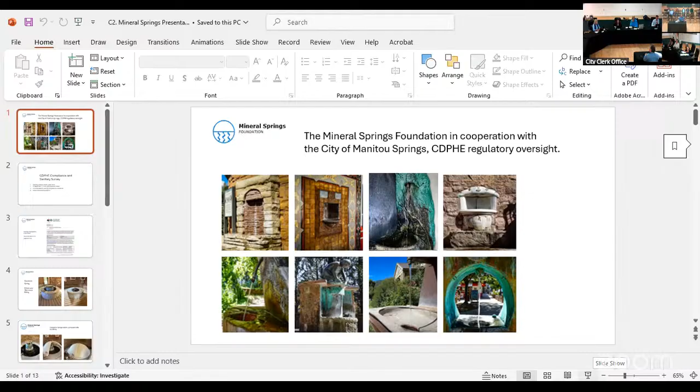Good evening, counselors, ladies and gentlemen of the audience, Mayor Graham, Mayor Pro Tem. My name is Douglas Keithley Edmondson. I am currently chair president of the Mineral Springs Foundation, and I'm here this evening to share some perspective on the current situation of the Colorado Department of Public Health and Environment's regulatory oversight that has taken place in the last 3 to 4 years with the Mineral Springs Foundation.

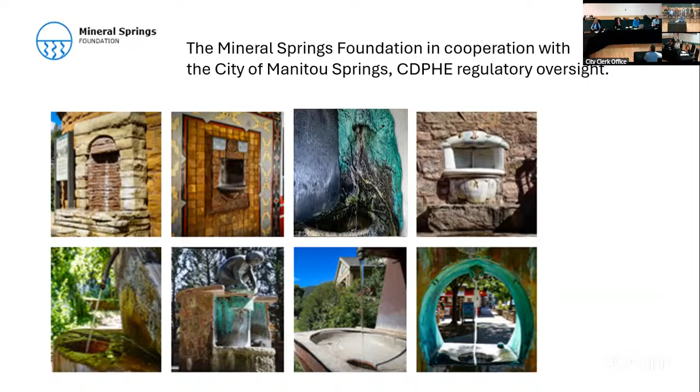Then in June of 2023, we had a sanitary survey conducted of all 8 springs, which are under the umbrella in cooperation, in concert with the Mineral Springs Foundation and the City of Manitou Springs. 8 major deficiencies were found and 11 minor ones.

These things basically started with screening on certain openings, what are called duckbills or tideflex exclusions for drains, up to major deficiencies such as Navajo Spring and Cheyenne Spring, that were open cisterns requiring engineering to be sealed. Also, one of the things we did not have was a monitoring and maintenance schedule acceptable for CDPHE's requirements for a municipal water system.

I'll start off with one of the major deficiencies. Shoshone Spring, as you know, was an open cistern. This is a before and after picture of it. Some of you remember the gas bell that was there that was removed. It was conserved and is on display inside of the rotunda.

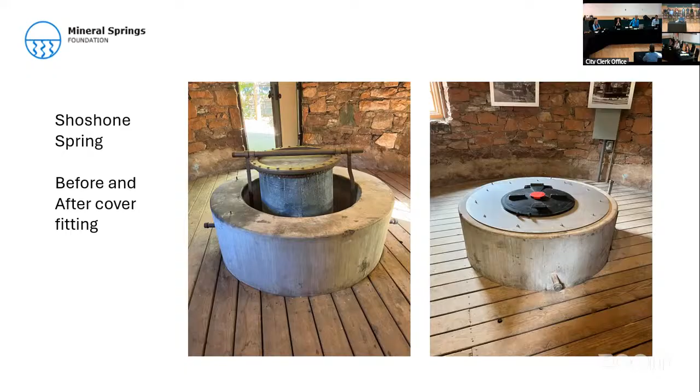This was one of our major compliance issues. Cheyenne Spring, we were really looking at possibly having to close this due to the size of the cistern. It was 96 inches across, inside dimension.

The old gas bell is made of copper and bronze, and we were given the green light to keep that in place. It's historic and it caused no contamination to the water, but trying to cover this was a real problem. Trying to come up with ideas that would have been cost effective, anything less than $250,000 was not foreseeable. But in all actuality, I came up with this idea.

So what I did is I reached out to many manufacturers in America, couldn't find anybody. Then I found a place in Canada that would actually be willing to manufacture this cover, NSF 61 certified, in 4 pieces, so it could be removed and modified. And we were able to execute this entire project for about $15,000.

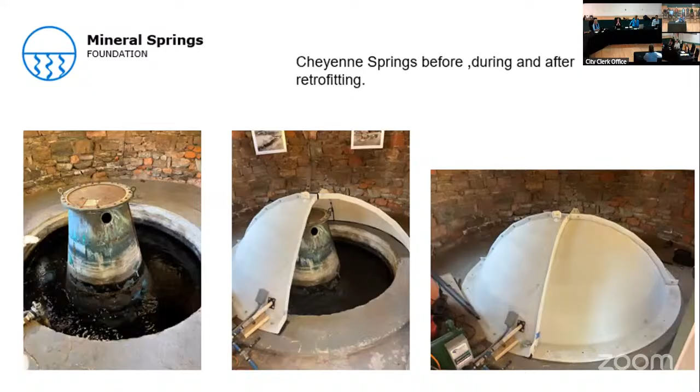Our last big one was Navajo Spring. Navajo Spring, as some of you may know, is under the floor of the storage room of Patsy's Popcorn. It was part of the original rotundas that were built in the 1890s.

So as you can see on the far left, the gas bell and cistern had been in place under the floor in that condition for 135 years. Once we got into it, we realized that the engineering and the designs that we'd come up with did not work. So we had to do a lot of field retrofitting.

As fate may have it, I got a phone call from a professor at CSU. This photograph in the center is of the professor and his students that called us right in the middle of the project, just out of the blue, asked us about the mineral springs, and came down and collected samples of bacteria and extremophiles, looking for organisms that would actually consume carbon dioxide for the potential of managing pollutants in the future. And then, of course, all of that has been documented, and here in the near future we will be posting that science on our page.

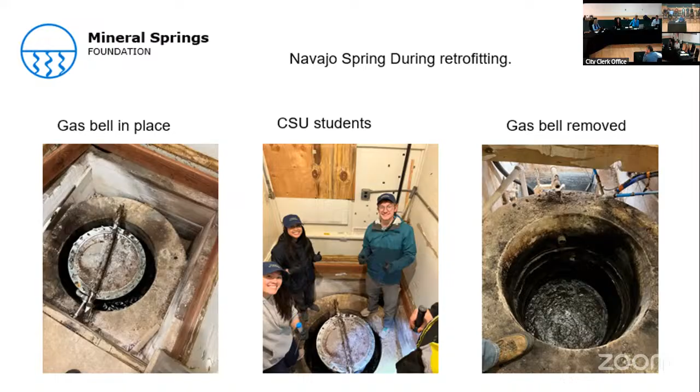But you can see that we had to remove the gas bell. And here's the gas bell removed. If you are wondering what happened to it, those pieces were conserved, and the top of the gas bell will be placed on display, donated to the Heritage Center. Again, that gas bell had been in place for 135 years.

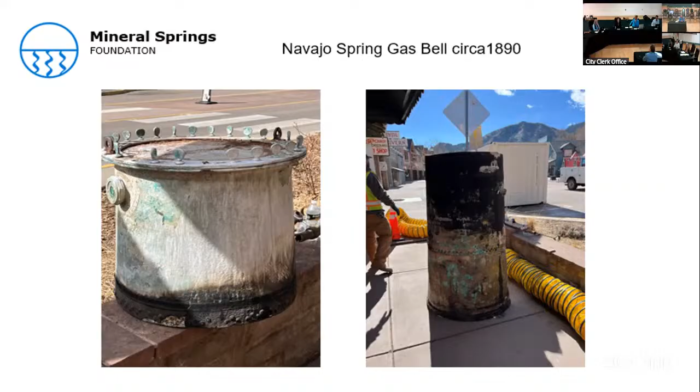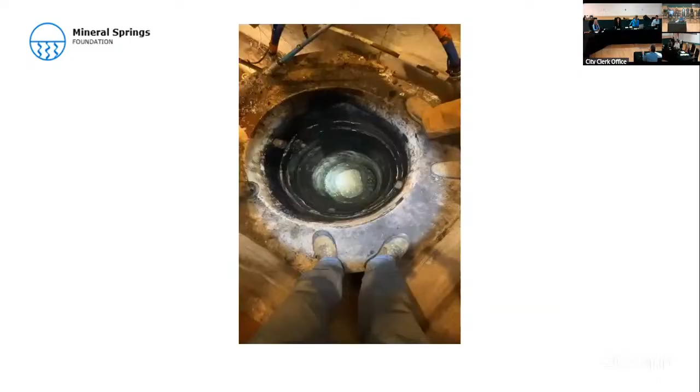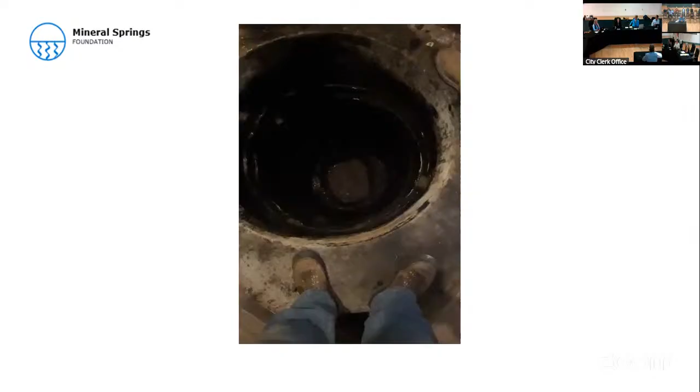And when we removed it, this is what we saw when we drew down the spring. It was 15 feet deep. And what you're looking at right there is the first time that people have laid eyes on the spring in its natural condition in 135 years. And as you can see, the water bubbling up and the gas escaping, so on and so forth.

Navajo Spring was a very expensive project, right around $150,000. And that is because once we did all of this work to it, we encapsulated the cistern with its NSF 61 certified lid, with all of the mechanical passthroughs, access panels, so on and so forth.

Before, you had to go in and open up the floor, and basically it was a 10-foot drop straight down into an unventilated space. It was extremely dangerous and very unhealthy for the people who were working there because the carbon dioxide gas would accumulate in the storage room.

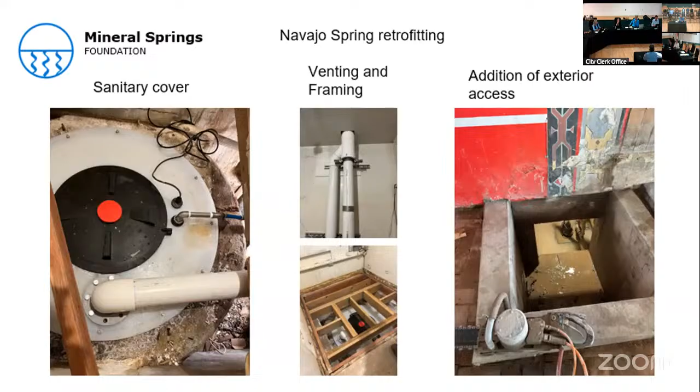Maintenance, monitoring, and testing. One of the things that we got dinged with during our deficiencies was we didn't have this. This is our binder for 2025 alone. And I'm going to go ahead and open this and read to you. The Colorado Department of Public Health puts this under, this is our monitoring and operational guidance handbook for the Colorado Public Water System utilized hand pump wells, which do not provide continuous disinfection. So that is, if you look this up on CDPHE municipal water source, that is what we fall under. And therefore we have to adhere to those guidelines.

Now, we've gone through a couple of public works managers over the last few years, but during that entire time, a gentleman who is our ORC of record, Dan Olson, has been working on this from beginning to end. He's the one that does the monitoring. He's helped us do all this work, help us put it together. He, Sean Dearborn, and some of the folks that have come before us, I can't sing their praises enough, but he does an excellent job of this.

Every single test is recorded. Every year we do nitrates is recorded. And now we have a handbook that helps us monitor and maintain the mineral springs, which we did not have before.

Just to let you know what happens to a community that doesn't take care of its mineral springs. Mayor John Graham may know, and so does Denise Howell, that earlier this year I was asked by a community called Excelsior Springs in Missouri. The Missouri Department of Natural Resources advised them that if they wanted to do something with their mineral springs, that they ask us - that was CDPHE to send us that way. So after a few phone calls, I was asked to visit Excelsior Springs, Missouri, and try to retrofit and bring some of their mineral springs back online.

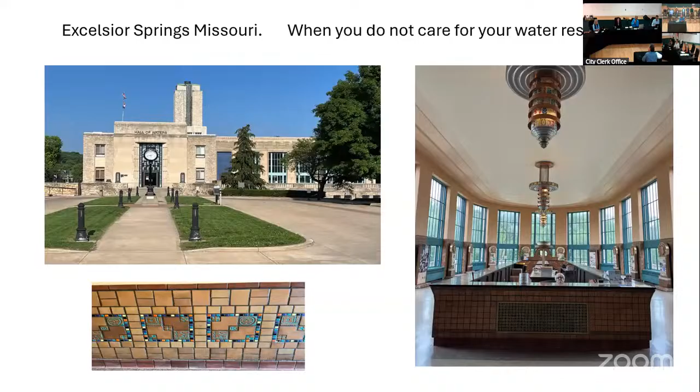When I went to Excelsior Springs, I found this beautiful Art Deco building, much like our spa building, but a little bit later. At one time, their big water bar had 7 springs serving water. They have preserved this building, but it's basically abandoned, and so is their entire downtown area. So by the late 1980s, early 1990s, they closed all but 1 spring, and by 1993, all of their springs were gone. This is the condition of their springs.

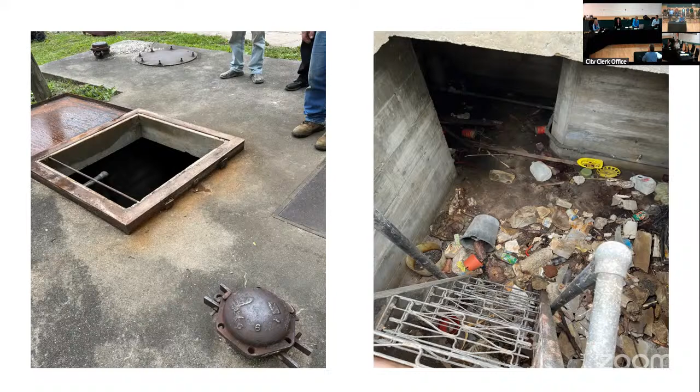I was asked to retrofit Lithia number 1, which looks much like Shoshone Spring and Cheyenne Spring. After my visit, unfortunately, their city administrator and their ORC of record were unwilling to engage the project. I did talk to this group that's much like the Mineral Springs Foundation. Apparently my visit there rattled the cage a little bit, and so they are pushing forward with trying to retrofit some of their springs.

But I wanted to show you guys that because we are so fortunate that in 1987, the Mineral Springs Foundation was formed and we have preserved our springs. Thank you to the city of Manitou Springs and our memorandum of understanding to maintain and keep these springs flowing in the namesake of our community. I will be of service to this community as long as I'm able, and we'll continue to ask your help, but hopefully we're on the other side of what has been a major obstacle for the Mineral Springs and the health of our community.

Are there any questions? Council, Julie? Oh, thank you so much, Doug. So is there a specific schedule that our city staff should be following in terms of the monitoring and maintaining going forward?

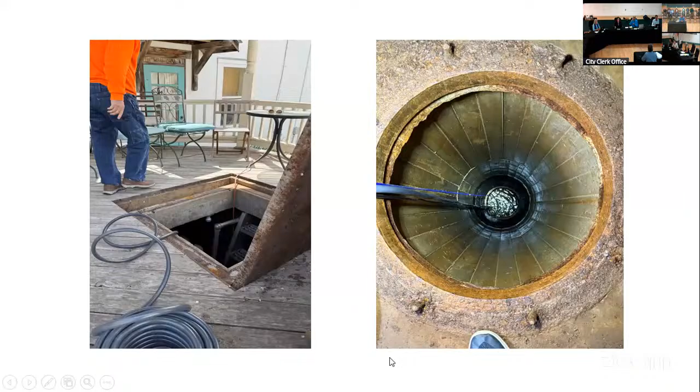So we test every month for what's called TSS, total suspended solids, and TDS, total dissolved solids, in the waters. The municipal water source up at the water plant, they test - am I correct, Ben? - on a daily basis. Ben Schmidt, our engineer in the audience, thank you very much.

We are mandated to test once a month. When we first started doing this, they were making us test every week. But since we have proven - one of the things we had to prove was called a GWUDI, or groundwater under direct influence. Some of the engineers from Denver thought that they were pretty smart and decided that water flowed uphill. So we had to prove that the spring water coming out of the ground was not being influenced by the creek or any other groundwater source.

So is that monthly monitoring done by the Mineral Springs Foundation or the city staff? It's done by the city of Manitou Springs because it has to be done by a certified water operator since it's considered a transient municipal source. I see, thank you, I have no other questions. Certainly, thank you. Other question, Judith?

Wow, I just loved going through this presentation in the packet. I'm so impressed with how you pulled off Cheyenne Springs, and I don't know how you found a company in Canada and put that together in 4 parts, but kudos. My only question is, you mentioned the signage, that it will most likely need to stay in place for the foreseeable future. Can you expand on that?

So we have to put signage, we have to display signage at the springs, at the fonts that say it's a non-chlorinated water source. That's pretty consistent throughout all natural water sources throughout the state. The manganese signs, the only way that we would be able to remove those is if the EPA changed its position. It deals with the federal Safe Drinking Water Act - is what that one does.

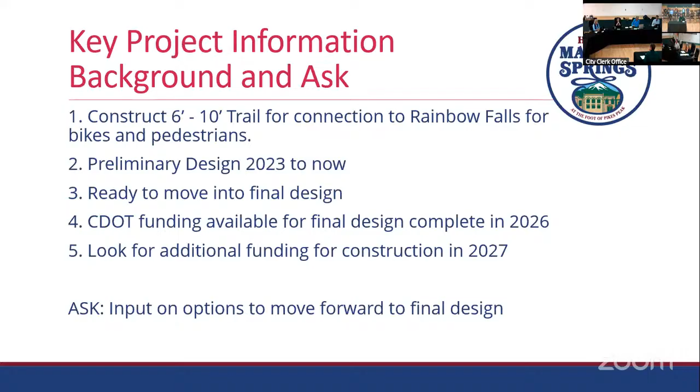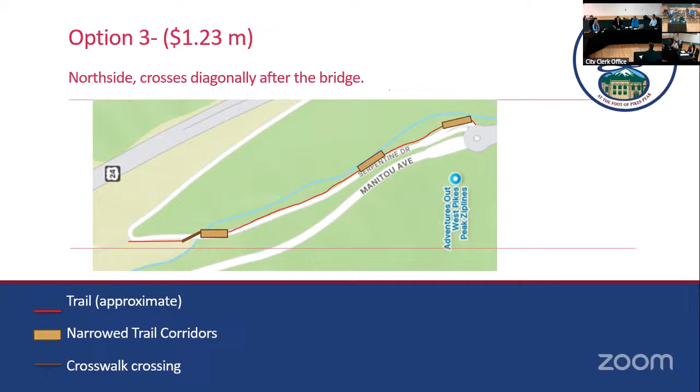Why don't we need, I don't really understand why the retaining wall is unnecessary in option 1. I'm going to go back to the existing condition really quick. If you can give me a really simple explanation too, because I'm not really good with all the technical stuff. Yeah, of course, and the best way I think I can show this is through just this visual option.

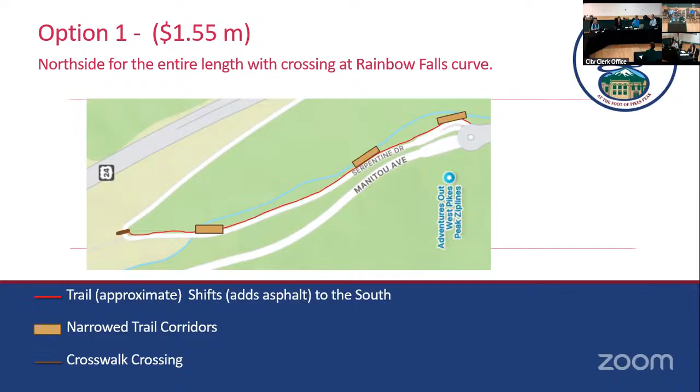So if you can see the trails on the north side of the road right here, we have a little bit more flexibility, but we still have to do retaining. If you can imagine the trail being built along this side of the road, we still have to do a relatively long section of retaining wall along this whole portion here. But where the challenge becomes is this corner right here. That's where a lot of the expense resides, because you have to create a safe crossing that's ADA compliant, meaning nice flat accessibility, and make sure all the sight triangles are correct to protect people at this critical corner.

This hairpin is particularly challenging because if you're driving down there, it's tough to see pedestrians, so you have to put a lot of effort into making that crossing compatible with both vehicles and peds. So while you get a little bit of benefit on this side of the road by bringing the trail here with a little bit less retaining wall, you still have to fix this crossing right here, which is the expense.

I'm no engineer, but it just seems to me the way people fly down that hill in their cars, it seems like option one is not only the most expensive, but probably the most likely for pedestrians to get hit by a car. Do you agree? Am I seeing that correctly?

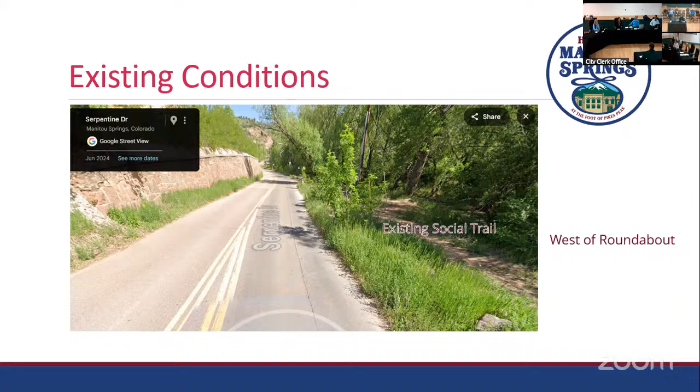So does option 2 or 3 make a difference in terms of that constraint? It doesn't, unfortunately, we're still bound by those constraints on all 3 options. Okay, and are there any other pros or cons between option 2 and 3? They seem very similar to me.

They are very similar. The main benefit here is a cost difference and an angle versus straight across.

So once again, we're still at 30% design, but once we decide which side of the road we want this project on, it really opens up the door to engineer solutions that align with the trail. If we look at this picture here, option 2 would have the crossing basically going across where this existing social trail label is, and then cross on the south side.

Once we have that determined, that we're crossing at this particular point, this road can potentially be adjusted to create what's called a chicane in the roadway to help slow people down a little bit and provide more flexibility and pedestrian buffer on the south side of the road. However, if we go with option 3, we're going across the bridge on the north side of the road and then crossing over here, which doesn't allow for as much of a traffic calming chicane.

So it's like a series of dominoes in the design to say, if we're staying on one side, then we have this flexibility to adjust the roadway. But if we're staying on the north side, then we don't have as much flexibility.

So another key question this brings up is, do we want some additional traffic calming with this roadway between Rainbow Falls and the bridge along the hairpin turn to help slow people down a little bit more? However, it creates challenges for larger vehicles coming down and making that turning radius there.

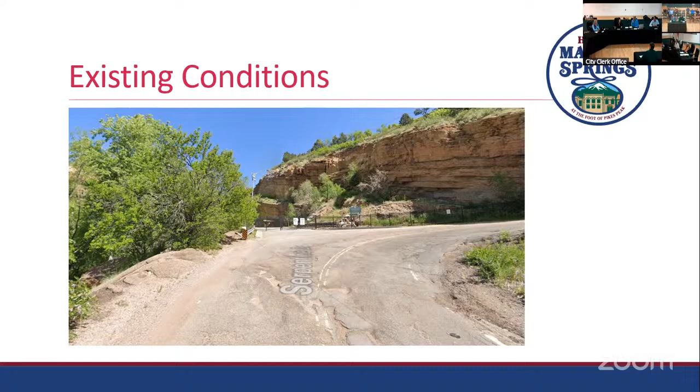Okay, thank you. John, did you have comments? Well, as somebody who walks this about 2-3 times a week, I would say option 2 is the best thing. I'm a little bit leery also about just the pedestrian safety of kind of a diagonal crossing there.

That just seems a little confusing and whatnot to have cyclists and pedestrians and whatnot crossing a corridor in which there's traffic coming at that kind of an angle, okay, as opposed to a perpendicular angle where you're much more aware of having to really actively manage both directions.

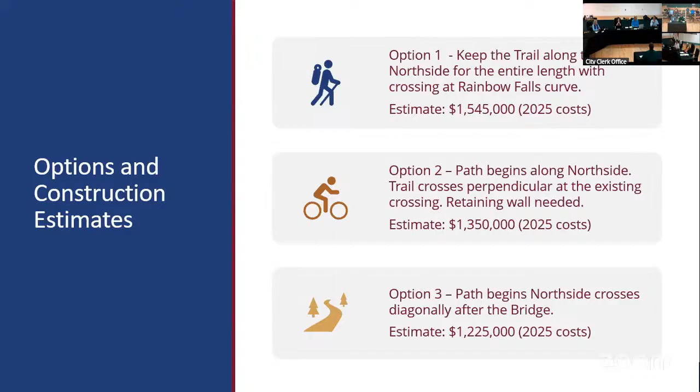I think the other thing, if we want to retain some of that parking that is up there, that crossing also is good for that parking as well for people accessing the creek. Otherwise, I think they're just going to informally cross there and make their own crossing regardless of what signage or barriers or whatever we put up.

So it seems like if we're going to retain that informal parking there on the left side, this side of the bridge, then that current crosswalk, I think, is a pretty good place. And I like your idea of trying to do some traffic calming, because let me tell you, it's signed 20 miles an hour. There's no way that enforcement is happening up there or that is what's occurring up there. I would say the speeds are easily 40 miles an hour until you basically get to that hairpin curve. And then if you're not really slowed down, you're through the fence.

Thank you. Well, and you make an excellent point about parking there, because it's logical if you are able to get into one of those parking spaces and park there to link directly into a path that's on the south side of the road. That's an easier transition for pedestrians getting out of their vehicles to go there. So thank you for making that point. That's great. Thank you. Other comments at this point?

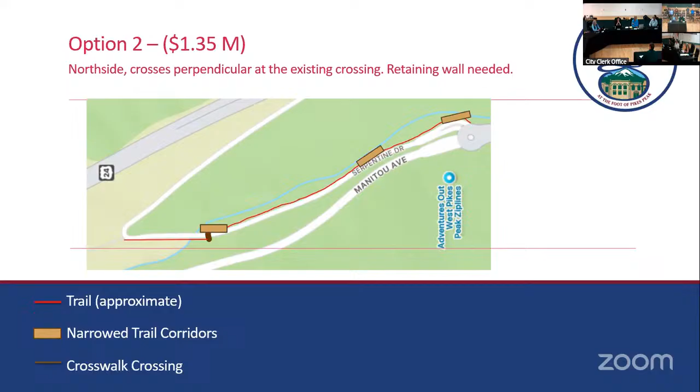I have one question, and this is an engineer 101 question. On option 2, where the cross would be, where you're crossing, is that an area where it's really bottlenecked, where it's going to be narrower, like 6 feet, versus option 3, where it's after? Does that have any bearing on the safety, where it's narrower, where I see a lot of people that are going to be on this crosswalk? Is that going to really bottleneck that up, or is that really not an issue?

Well, you make an excellent point there. So typically when you have places where you're slowing down to look and cross as a pedestrian, there's a natural constriction where everybody's stopped to wait at that intersection. I can see that providing a lot of benefits for people, especially cyclists coming down. If you're moving through and anticipating just being able to go across the intersection without slowing down, sometimes you can get a little complacent as a cyclist. Whereas if you come to a constricted area, which this next slide details in the preliminary plans...

So the area I believe you're speaking about is right here before the pedestrian crossing. As you can see, this goes from 10-foot wide and constricts down to 6, but this is natural traffic calming that works both ways for both bikes and vehicles. So there's a natural traffic calming location here for bikes to slow down before they make the crossing. It's a natural congregation point for peds to slow down before they cross. So you make a great point, but the benefit of the constriction is that it slows everybody down so they can pause. You have a good flat area where you can set up all your ADA crossing. To Councilman Washeda's point, you've got really good sight lines at that bridge, and so it would allow for a safer crossing and transition there.

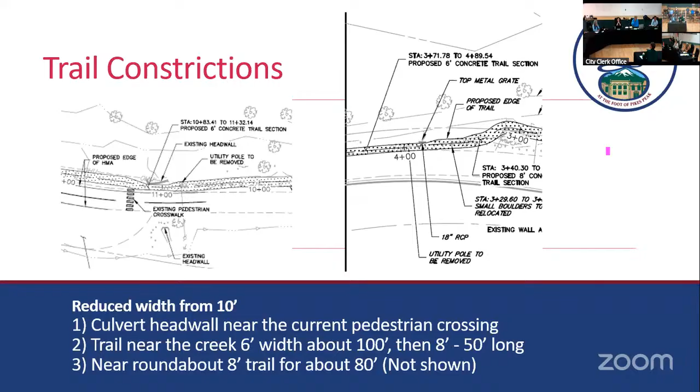So this slide just basically goes through those constrictions that we had talked about.

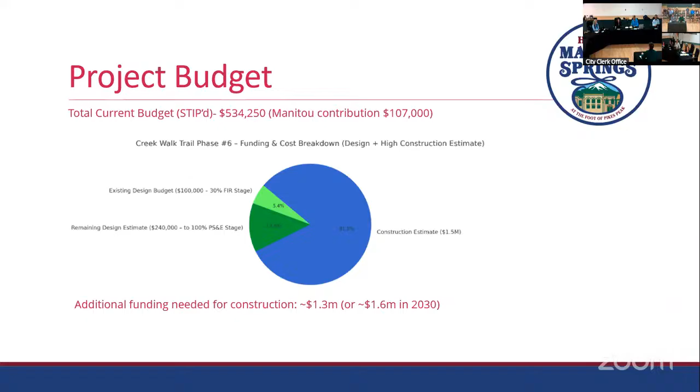And so to speak to the point Denise brought up about the funding options that we have, there's MMOF funding, or these transportation alternative funds, the TAP funds in future years. That's what Creek Walk 4 is being funded by right now. The PPRTA 3 capital program is one of just 3 capital programs, so we can continue to put 20% of the funding into this over the next 10 years towards Serpentine.

That's basically kind of like a savings account towards the project. We could fund it that way. There's future open space funding, and then there's also other opportunities through GOCO grants and things like that. These are all funding sources the city's very familiar with and that we pursue. It's just helpful to have the exact target that we're looking for and how we can keep going after these things.

So some of the big budget assumptions are that the utilities would be underground. To your point earlier, we can find out where exactly those impacts would be, because there's potential cost savings there if we can keep the trail outside of that. If for some reason that was the big linchpin that was driving the project in one direction or the other, we could design a way to not have them undergrounded.

And then some trees would need to be removed. But as always, with any city project, we always look very carefully at what needs to be removed before that's done. Serpentine Road would need to be narrowed, and the construction oversight would be included in the estimates. But this is something that we can look at in future years now that we've got some excellent hires in the city to potentially do some of this construction oversight as well. So that could be deducted out of it.

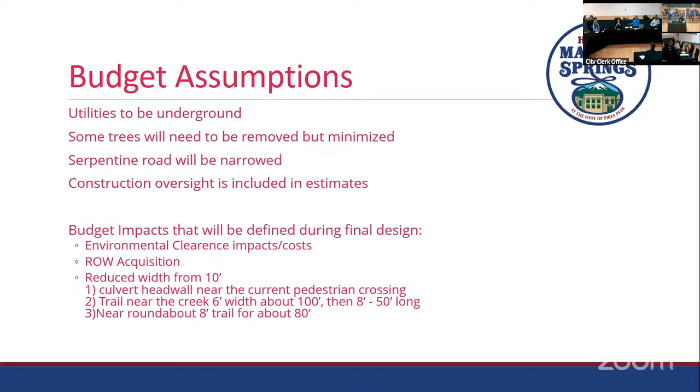So that's just one of the things I wanted to put on the slide, as well as the reduced width from 10 feet, which we've discussed. So what I'm asking for help with tonight is what option is preferred.

Great, thank you Ben. Glenn. Council, I think we can go ahead and ask some more questions. We've asked some questions already. We had a little more information, so I think it's fair to continue the dialogue here.

We've had several people, members of council, have expressed support for option 2. So I guess let's ask our questions. Then I'll go around the table and ask what you're gravitating to, and we'll see if we can maybe come up with some direction for staff. So do you have any additional questions for Ben or for Glenn? I guess not—let's go around.

Julie, I don't have a question, but I have a comment, please, and I don't know if this is premature. I'm certainly in favor of option 2 for a lot of the reasons that have been expressed. But I'm also in favor of reducing the 10-foot sidewalk, because I find that to be dangerous. Just the way that when we narrow the road, the cars have to go slower. Since we've got these huge sidewalks now, those bikes and other mobility things besides bikes, they like to fly by there.